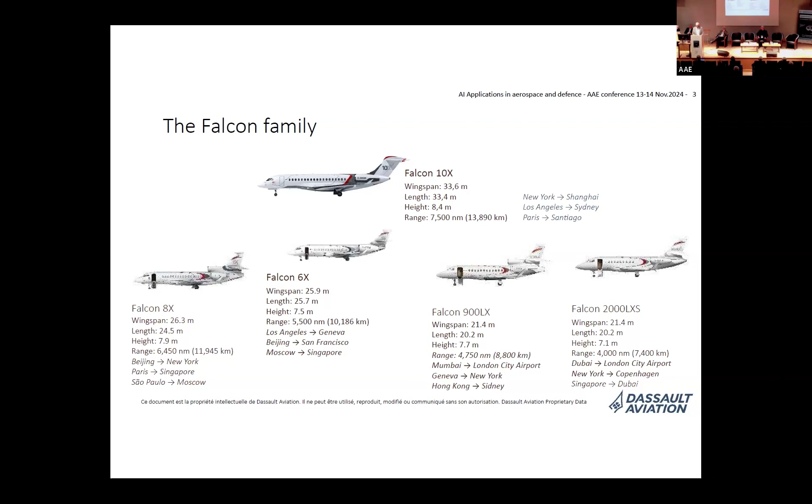A takeaway message: the Falcon family has more than 1,200 operators in more than 80 countries, for approximately 2,100 aircraft in service. We are in the family of business jets, with 10 times more airfields accessible than for commercial liners, but approximately 50 times fewer flight hours per year. So it's a scattered family. We have long-range aircraft capable of more than 10 hours flight, but we need to combine efficiency and flexibility, fulfilling the needs for travel over short jumps or very long distances.

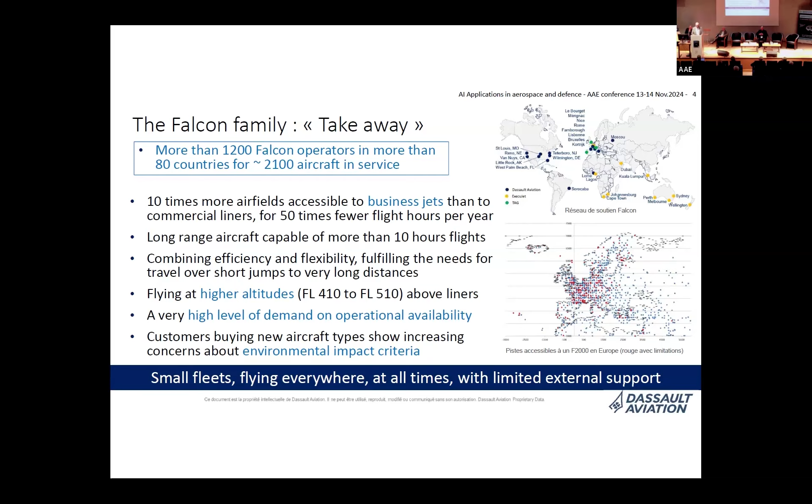Usually business jets fly at higher altitudes above liners, and we have a very high level of demand on operational availability. Customers buying new aircraft types show increasing concerns about environmental impact criteria. So we have small fleets flying everywhere at all times with limited external support, and people that can afford to pay for environmental impact criteria costs.

So with respect to the increasing environmental stakes and issues in aviation, sustainable aviation fuel is to be generalized to all of our aircraft. Falcon 6X is performing its first 100% sustainable aviation fuel flights, which has just been done end of 2024. Falcon 10X is going to be compatible for 100% SAF upon entry into service.

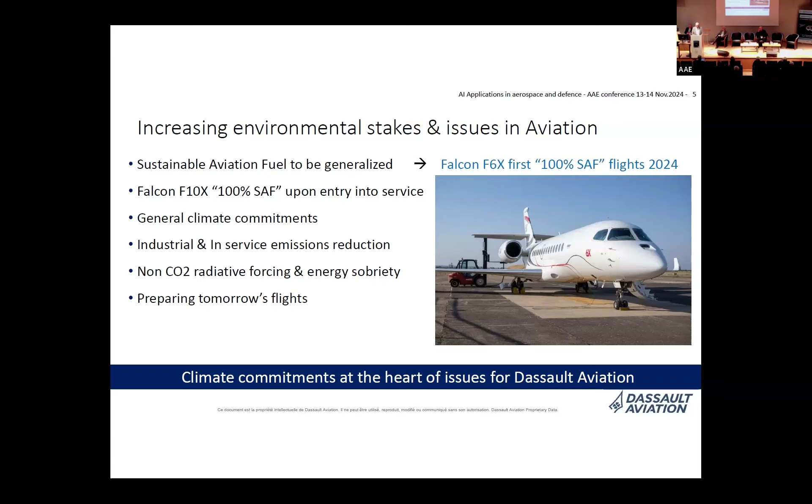And we fulfill general climate commitments. I will come back to this focus concerning non-CO2 radiative forcing and energy sobriety that we want to introduce into the preparation of tomorrow's flight. So the climate commitments are at the heart of issues for Dassault Aviation, but let's go back to artificial intelligence.

We have more data and less time to analyze it, so we need accelerated data analysis. We have data from flight tests, from development teams, and production data also. General aviation commitments for sustainability impose new technologies, and we need to optimize aircraft operations, which requires new tools. We need new monitoring processes that exploit the data in order to maintain the high level of safety that is required.

So AI applications will concern flight test data, accelerating the analysis, in-service data, trend monitoring, prognostic, and maintenance. At this stage, we'll talk about operational availability and flexibility as the key issues at the heart of issues for Dassault Aviation. We are talking about continuing airworthiness monitoring.

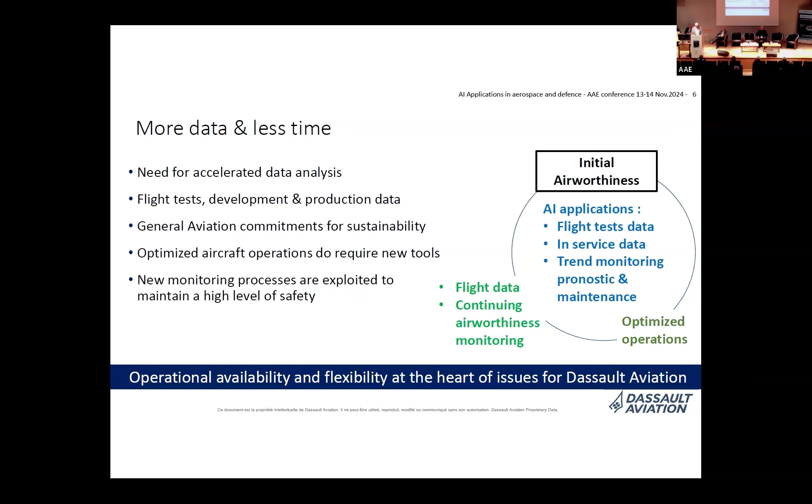But we are also developing new products. Falcon Care, for instance, is an innovative program designed to help customers achieve stable, predictable maintenance. The new multipurpose maintenance system equips Falcon 6X and 10X. And we propose in-service trend monitoring, diagnostic, and prognostic for enhanced maintenance, dispatch, and operational availability—operational availability and flexibility again.

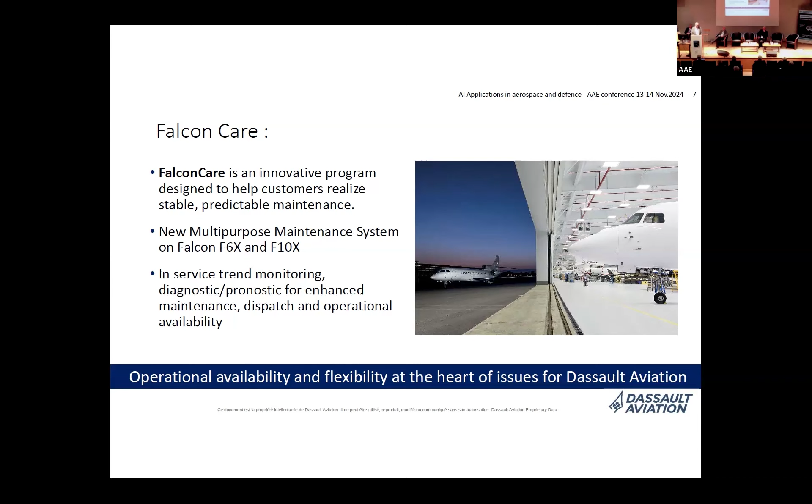At this stage, I will not use the term predictive maintenance. We are optimizing the flights using the current regulation, but we are developing future activities. Developing future sustainable aviation aircraft requires new technologies. Those new technologies are less advanced and we have less return on experience, so we need new monitoring processes to maintain a high level of safety with those new technologies.

For instance, more electrical aircraft—and more electrical does not mean everything is going to be electrical on the aircraft, far from that. Towards extended continued airworthiness and continuing airworthiness monitoring, we need to take advantage of digital continuity, data, and artificial intelligence. That's how Dassault Aviation is preparing the future of general aviation, with AI applications on data for sustainable aviation technologies, flight data, continuing airworthiness monitoring, and optimized operations.

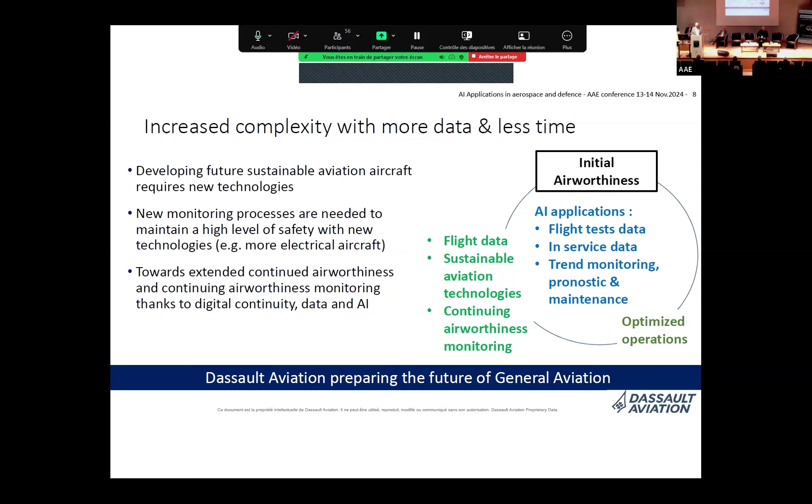Increased complexity, that's the everyday landscape at Dassault Aviation. We have large-scale acquisition and monitoring of in-flight data from test flights to in-service data. We are implementing hybrid AI, combining data-driven machine learning with systems modeling.

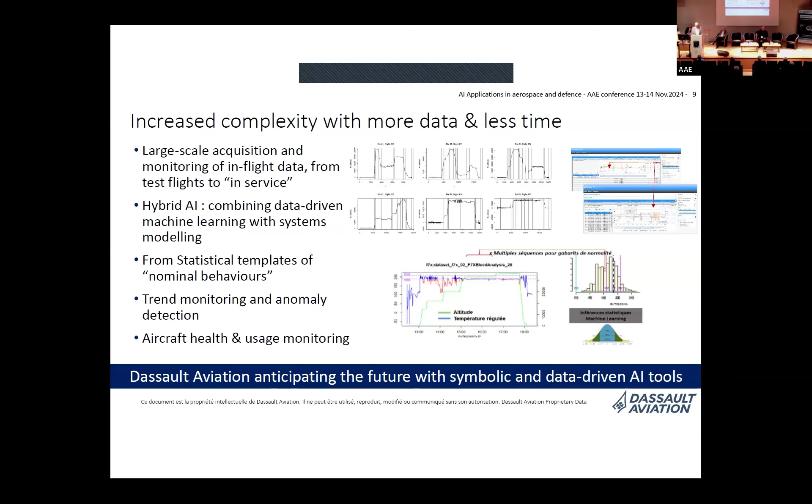We try to exploit our ability to design statistical templates of nominal behaviors that are used to perform trend monitoring and anomaly detection. This is applicable for general aircraft health and usage monitoring and preparing for the design of future aircraft.

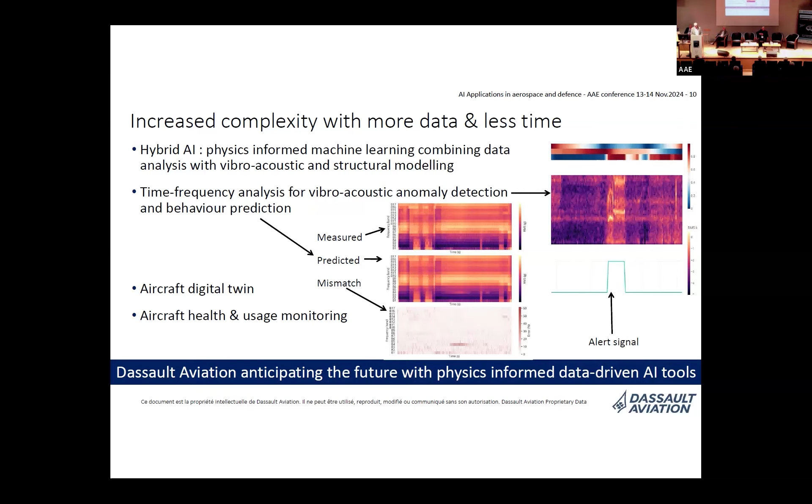In the case where we have measurements, we can test and validate that we are able to predict the right vibroacoustic behavior. This is somehow called aircraft digital twin, or aircraft health and usage monitoring.

We also are concerned with the cockpit. We need it for the purpose of designing our systems, designing our cockpits, and analyzing the way we organize and follow procedures on board our aircraft. We need objective measurement and analysis of human-system interactions.

Combining machine learning and knowledge-based AI, we are in the process of developing new AI tools and methods for the design of new generation aircraft using these new technologies. AI tools are also used for the training of pilots, especially for monitoring the activity and the relationship between the pilot and the cockpit, the human-machine relationship.

We intend to propose crew assistance functions for appropriate human-machine adaptation facing any situation complexity, and human-made decisions using machine computations, and we put it this way. Dassault Aviation is anticipating the future with hybrid data-driven and symbolic AI tools.

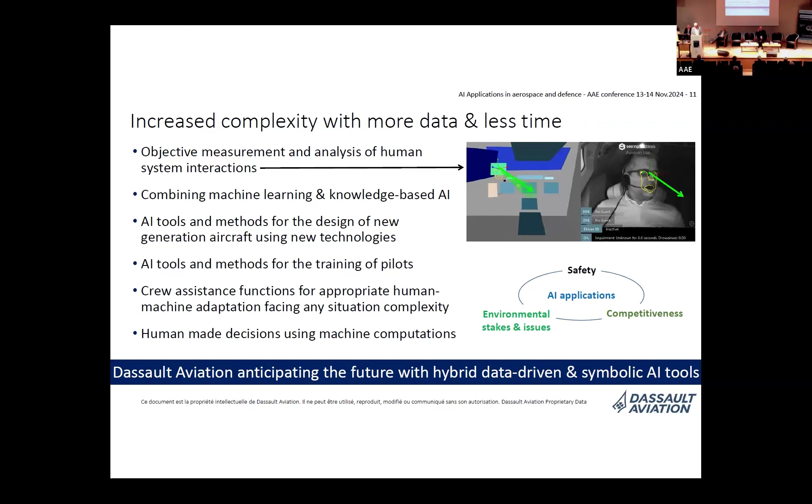Last but not least, coming back to environmental stakes, contrails and non-CO2 emissions, we have been working on this subject for years.

In a few words, persistent contrails occur when you have two conditions. First, you must form a contrail. This happens if and only if the Schmidt-Appleman criterion is verified, a criteria that combines pressure, temperature, and humidity.

Then it does not disappear, or will not evaporate, if and only if the area is saturated in ice and water. In this case, you have the formation of a persistent contrail, which can have either a cooling effect or a heating effect. Globally, it has an impact on the environment which is globally negative.

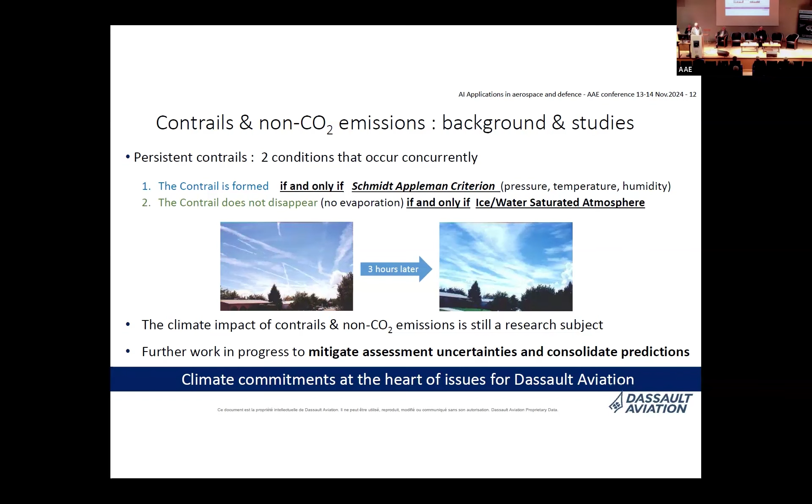So we need to do further studies to evaluate the impact and see what are the appropriate measures, to mitigate assessment uncertainties and consolidate predictions. This is what we have started to do with our colleagues from other airline manufacturers, like Airbus and Safran.

Recent statistics performed on our fleet, going back to business aviation, show that the climate impact of the contrail of one flight may be high enough to motivate a trajectory adaptation, with a detour or a change in altitude, to avoid this contrail. This has been corroborated by many studies: 2 to 5% of flights are responsible for 80 to 100% of the non-CO2 climate negative impact.

You can see in this image that you have cooling effect contrails. Typically, a contrail that degenerates into a cirrus in daytime develops a cooling effect, whereas a contrail that develops and causes a cirrus at nighttime is going to produce a warming effect. So I'm oversimplifying, but this is the idea.

So we need to mitigate that. How to do it? FalconWays is a tool for trajectory and mission optimization that has been developed and is still under development for each type of Falcon aircraft. It allows us to reduce CO2 emissions by selecting the most fuel-efficient route, and to take into account all the flight plan constraints. We plan to introduce the capability of avoiding the creation of persistent contrails.

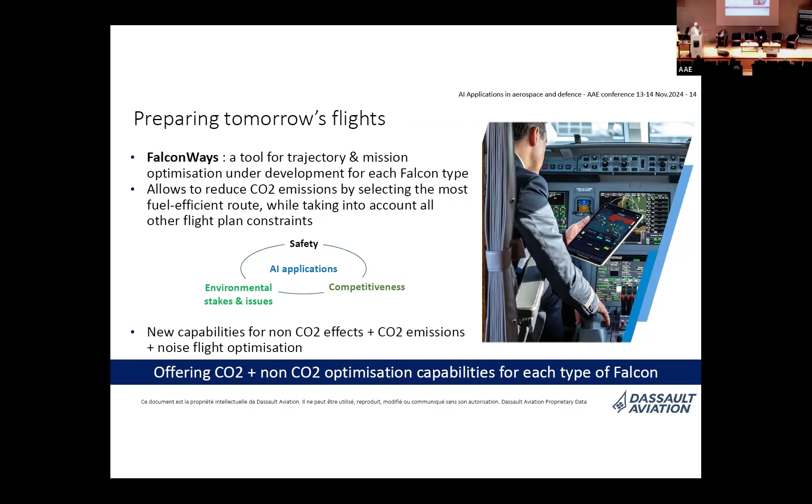So these new capabilities for non-CO2 effects and CO2 emissions, plus noise flight optimization, is going to offer those capabilities to the Falcon family. You can see in this case that we are really applying AI for attaining goals that are at the crossing of safety, competitiveness, and environmental stakes and issues.

We need to prepare tomorrow's aircraft, pilots, and flights: the system, the aircraft, but also the human and their training. We are developing applied AI assistances, models, methods, and tools to do it, anticipating the future of aviation. Thank you.